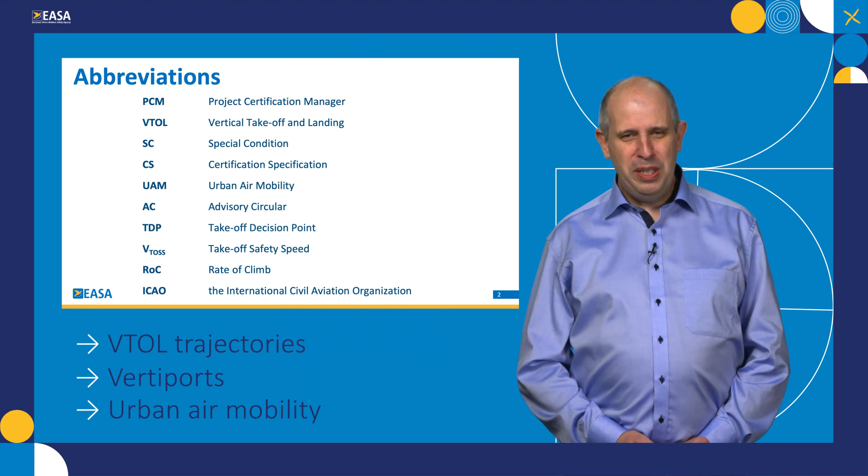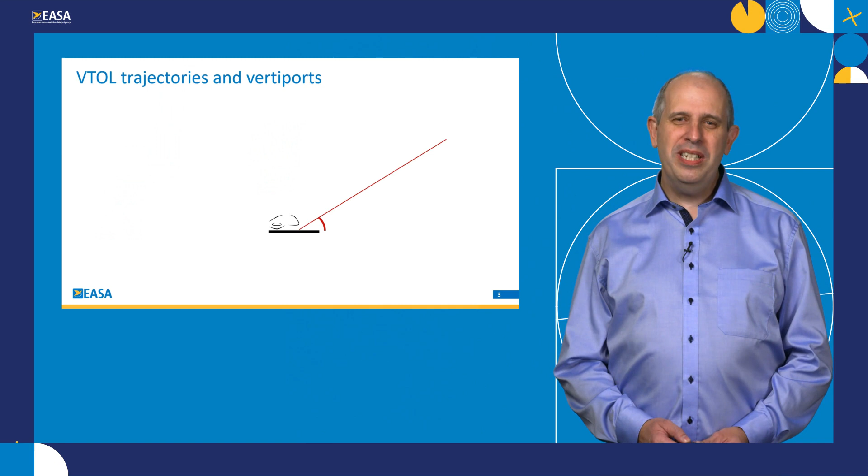VTOL trajectories and vertiports, why does it matter? If we consider a VTOL aircraft on a vertiport, the place from which it can land or take off, by definition a VTOL aircraft is capable of a vertical takeoff or landing. It may be, however, only the very initial portion of the takeoff that is vertical, with the rest of the trajectory being more or less shallow.

So if now we imagine urban environments, it could be that if this trajectory is too shallow, it may interfere with obstacles. In such a case, the vertiports have to be moved either further away from the obstacles or have to be elevated. So VTOL trajectories and vertiports matter in that they are elements to answer the question: what type of urban air mobility do we want?

If we are looking for intermodal connectivity, the vertiports have to be close to the streets, the train stations, bus terminals. It may be, however, that if the trajectories are too shallow, those vertiports have to be moved further away from city centers or have to be placed on top of tall buildings.

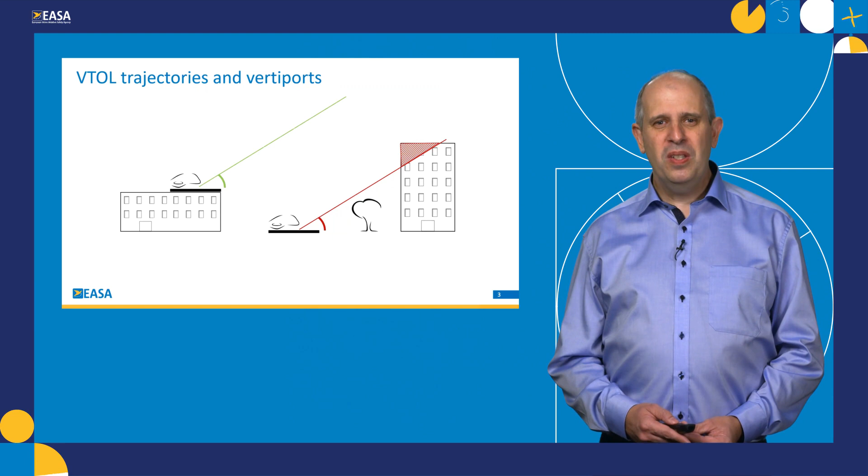EASA has published technical requirements for VTOL aircraft in a document we called Special Condition VTOL. I will present a few of these elements that influence VTOL trajectories.

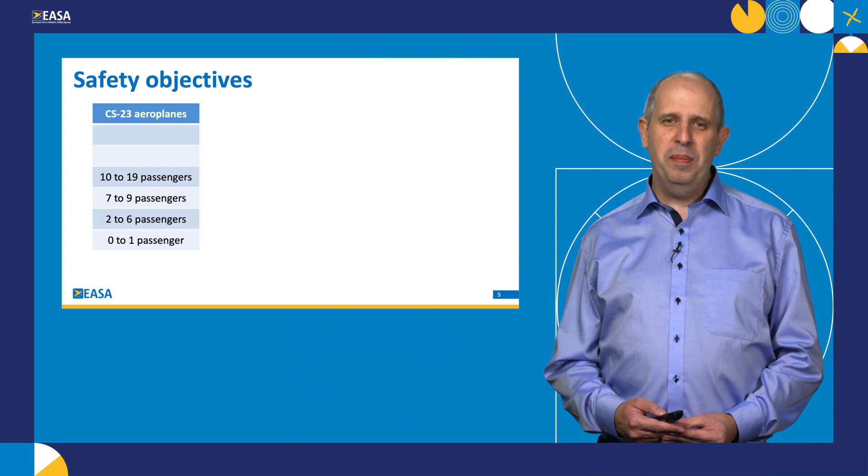The first ones are the safety objectives. For this, we took elements from airplanes where the objectives are proportional to the number of passengers on board. We also took the objectives from helicopters, which are independent from the number of passengers, but are divided in two categories: Category A, where in case of engine failure the aircraft is capable of continued safe flight and landing, and Category B, where in case of such failure a non-scheduled landing has to be assumed.

SC-VTOL combines both approaches with a category enhanced, independent from the number of passengers, equivalent to category A, and the category basic with a proportionality according to the number of passengers on board.

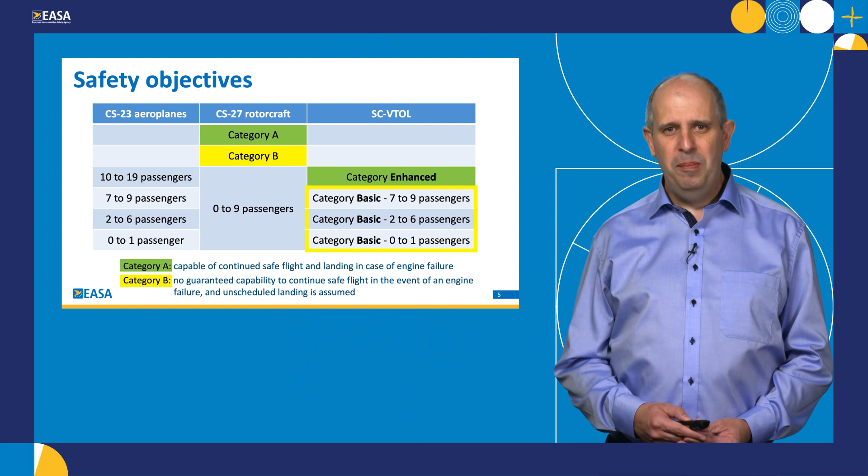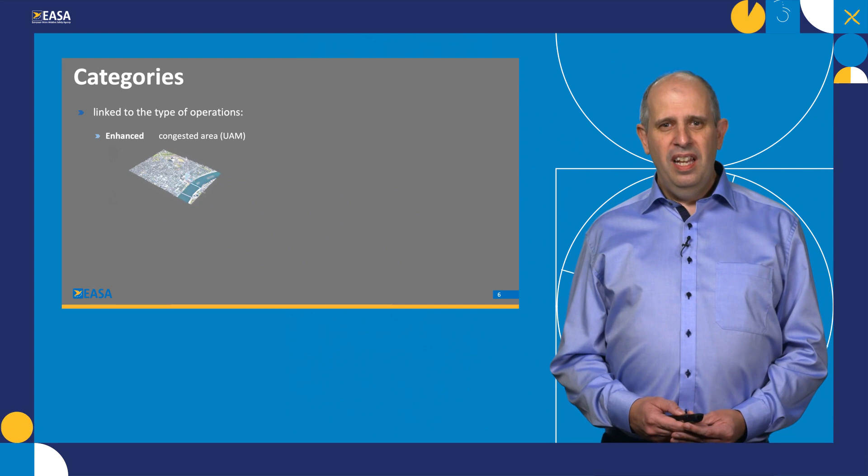A novelty we have introduced in SC-VTOL is a link between the categories and the type of operations. Category enhanced is requested for flights over congested areas, so what is referred to as urban air mobility. Typically this will be a flight over a city. It is also requested when performing commercial air transport of passengers.

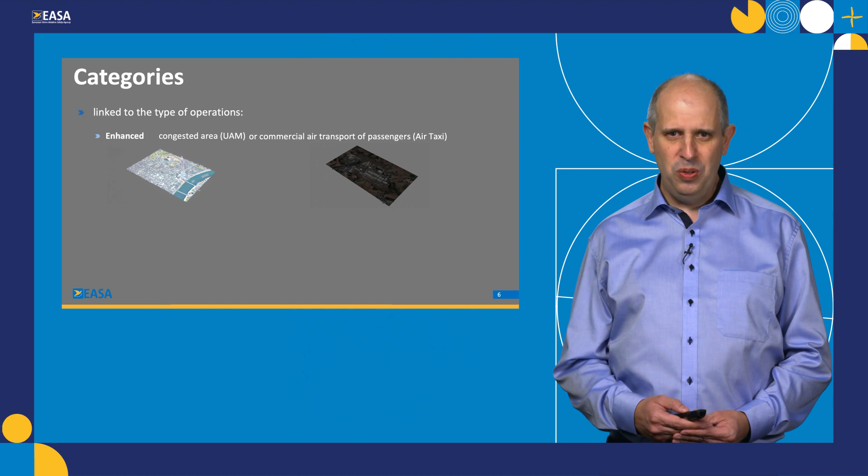An example would be when you land at an airport, then a VTOL aircraft comes and picks you up and brings you to your hotel. Even if you are not flying over a congested area, you will then be entitled to the category enhanced, and this is what is commonly referred to as an air taxi operation.

Basic is for all the other types of operations, for example, a private flight over the countryside.

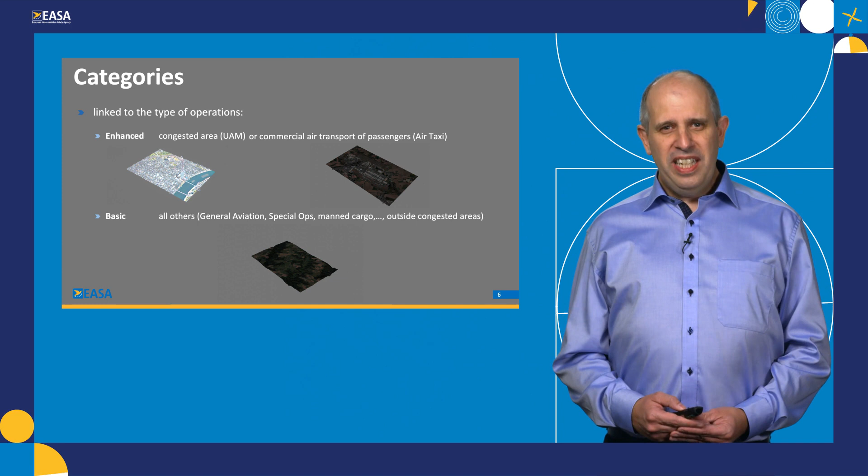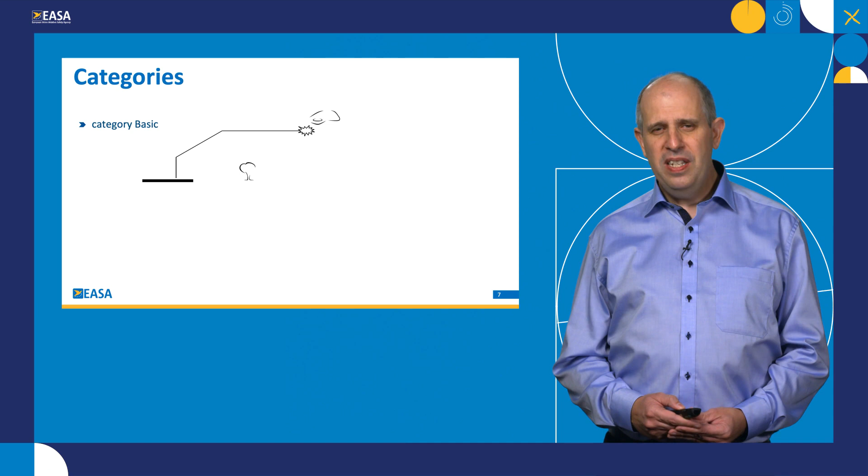With each category is also associated a performance objective. Category basic: if during the flight you have a failure of a system, it may be that you need to land right there and then. We, however, request that this landing be controlled, similarly to an auto-rotation for helicopters, and we refer to this objective as a controlled emergency landing.

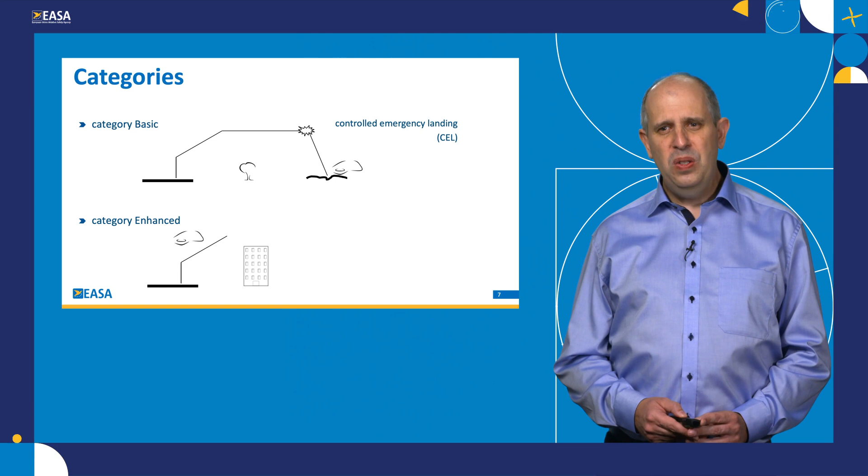For category enhanced, if you have a similar failure during the flight, then the objective is that the aircraft must be capable of either landing at the original destination, or it must be able to divert to an alternate vertiport. This objective is referred to as continued safe flight and landing.

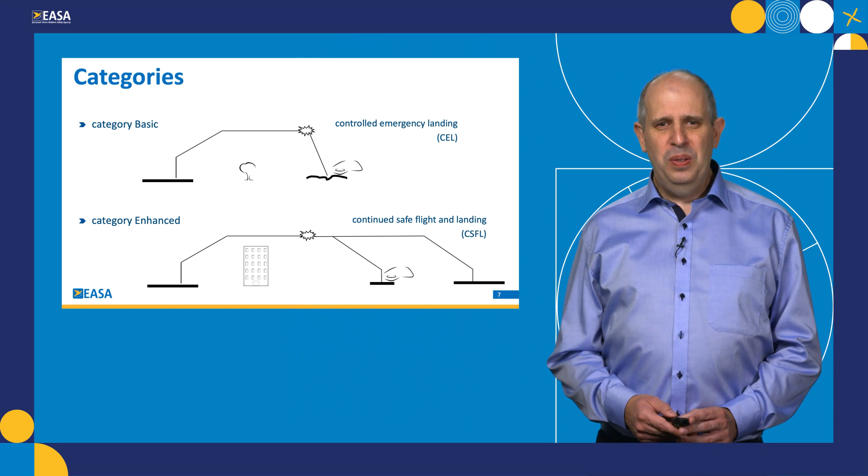Another element we had to work on is the catastrophic definition. Today, for helicopters, we have a number of different definitions. Some refer to continued safe flight and landing, some to auto-rotation, and we have also references to different numbers of fatalities.

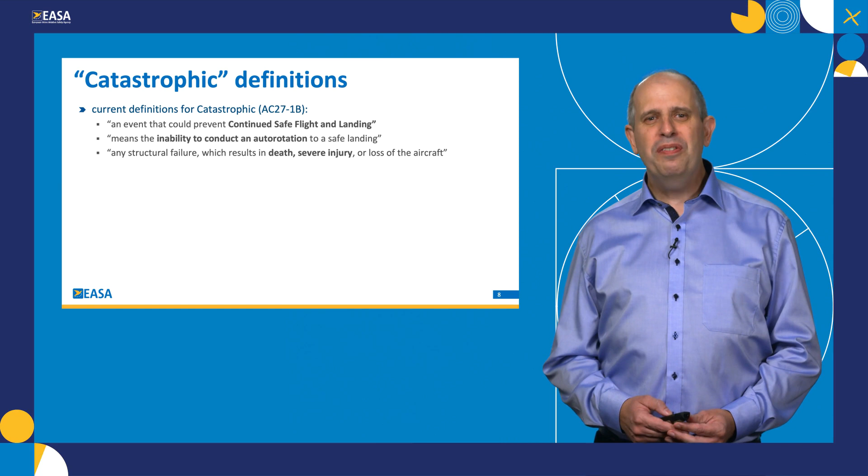So we consolidated all those definitions and introduced some proportionality through the categories. For category basic, multiple fatalities are catastrophic, as are failures that prevent a controlled emergency landing. For category enhanced, one or more fatalities are catastrophic, as are failures that prevent continued safe flight and landing. And for the rest of the presentation, I will focus on this last category.

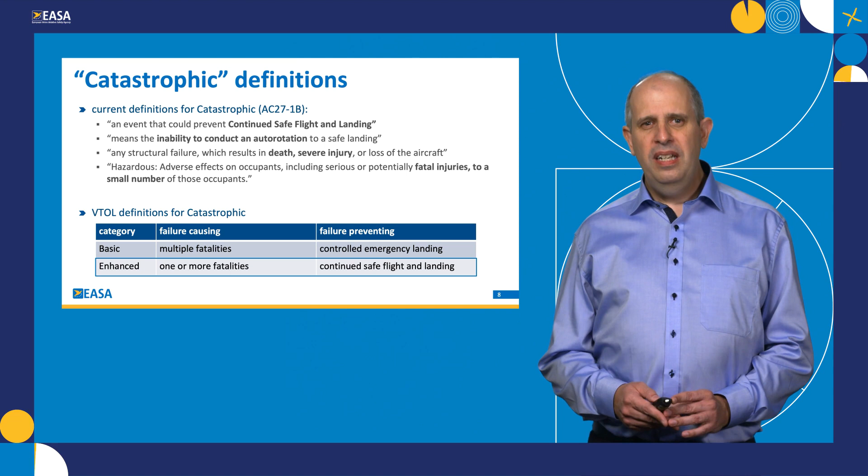An associated element is the critical failure for performance, or CFP. For helicopters in category A, we request a minimum level of performance in case of a loss of the critical engine or in case of one engine inoperative. The CFP is the equivalent for the VTOL aircraft.

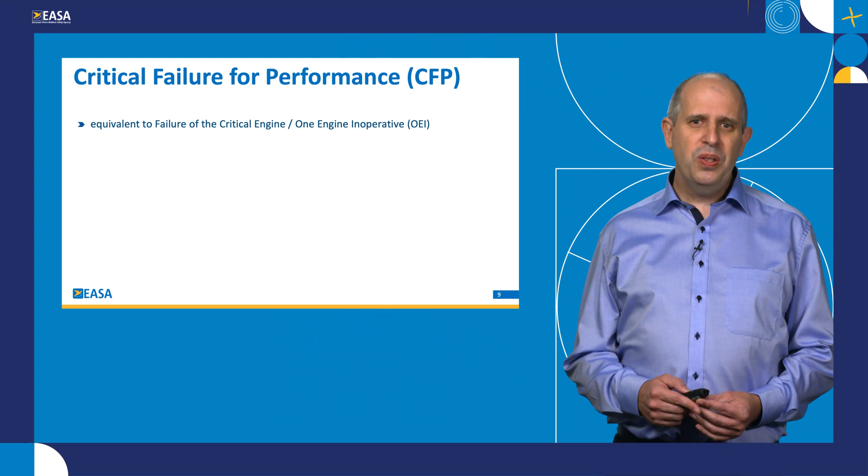However, while for helicopters in category A we have mostly 2 engines, for VTOL aircraft we may have up to dozens of them. So the CFP requests to consider single failures, but also any combination that is not extremely improbable. We also extend the concept not only to engines or motors, but to any failures of any systems that affect continued safe flight and landing. And typically this could be a battery.

We may also have a different CFP per flight phase and per performance parameter.

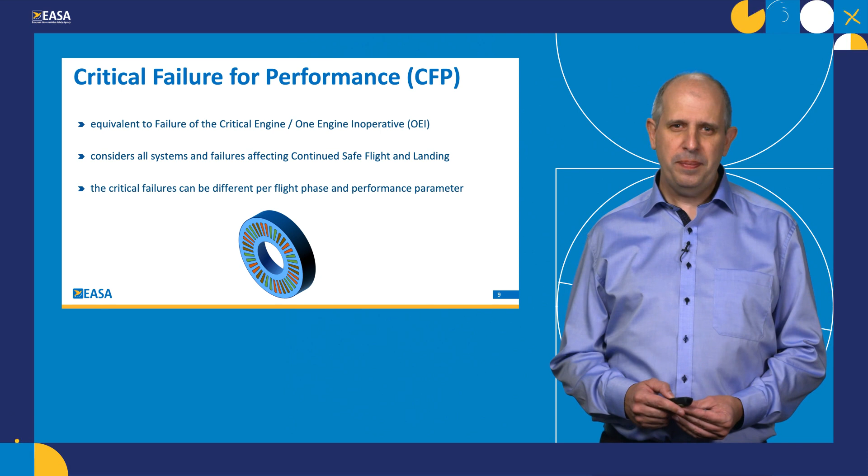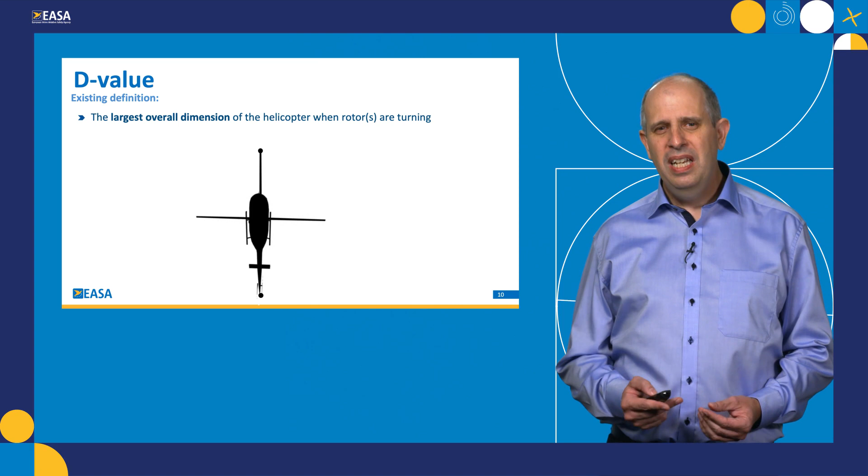Another element we had to adapt is the D value. For helicopters, this is defined as the largest overall dimension. And for most helicopters, this is defined by 2 points: the most forward tip of the main rotor and the aft tip of the tail rotor or the tail cone. This D value is used extensively for heliport design to provide obstacle protection.

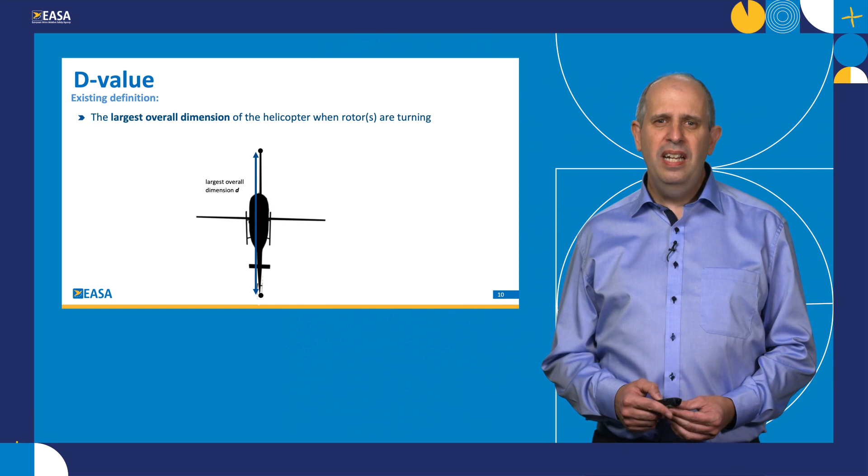However, specifically for obstacle protection, we are interested instead in the smallest enclosing circle, as by definition this is the smallest circle in which the aircraft can fit without hitting obstacles. For helicopters, the smallest enclosing circle is defined by the very same 2 points, so the dimensions are equal and it does not matter if you refer to one or the other.

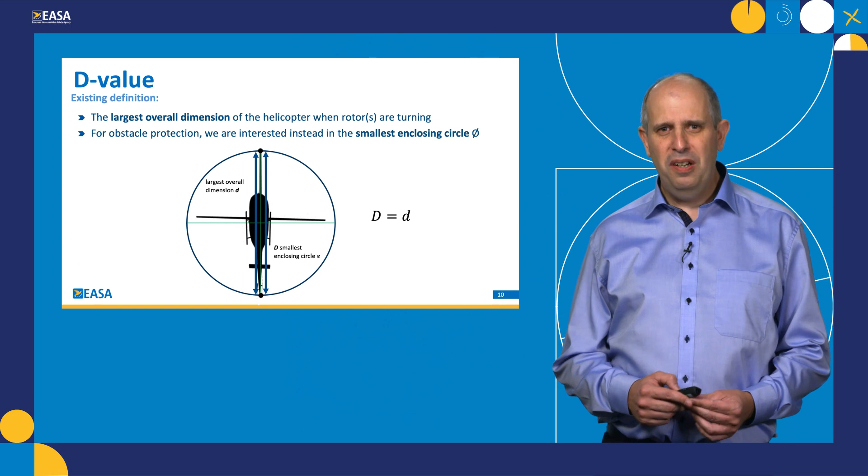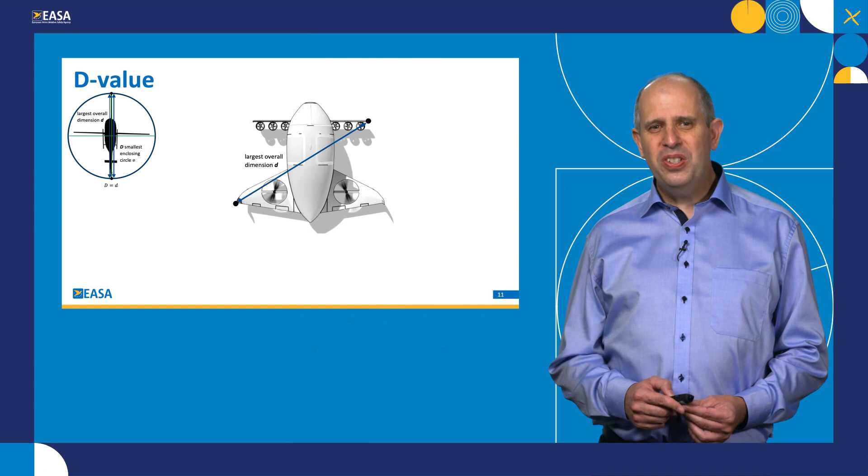For VTOL aircraft, instead, the situation may be different. If we look at an example of a generic VTOL, the largest overall dimension is defined by these 2 points, while the smallest enclosing circle is defined by 2 additional points. And we can visually observe that the diameter of the smallest enclosing circle is larger than the largest overall dimension.

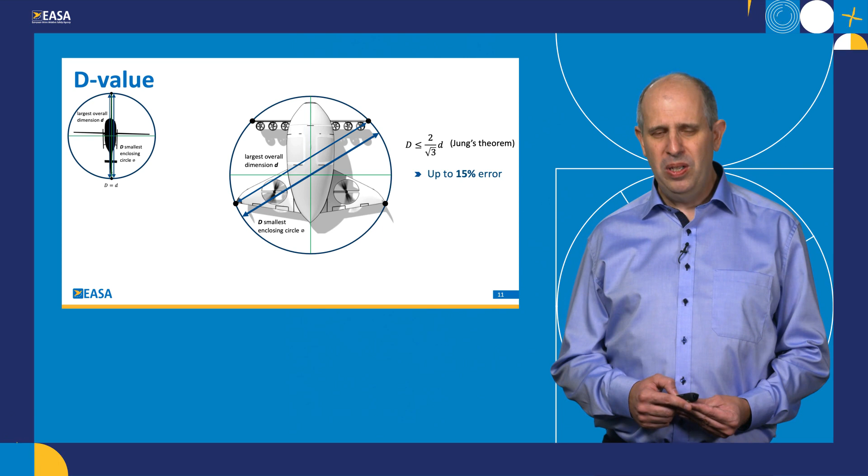It can be shown that there is a relationship between the two, and this equation means that if we were to use the largest overall dimension for obstacle protection, we may have up to a 15% error. So for VTOL aircraft, we are defining the D value as the diameter of the smallest enclosing circle.

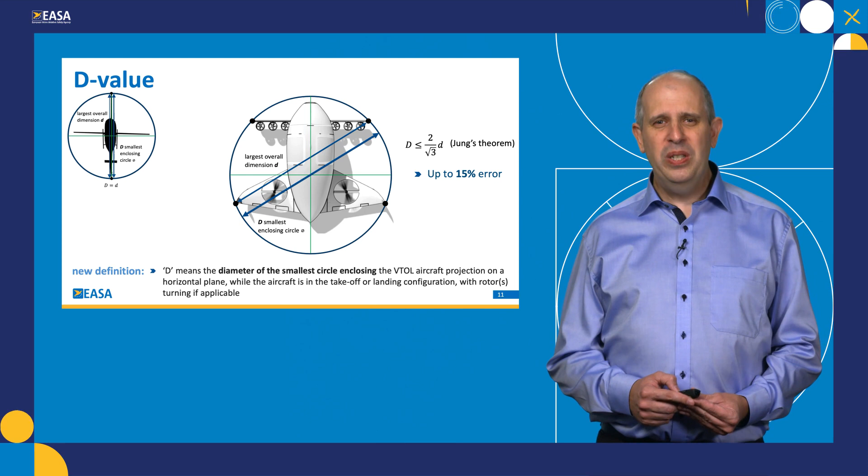With all those elements in place, we can now look at takeoff profiles and answer the question we initially raised: what type of urban air mobility do we want? The choice that EASA made was to leave maximum flexibility to the cities and to aircraft manufacturers.

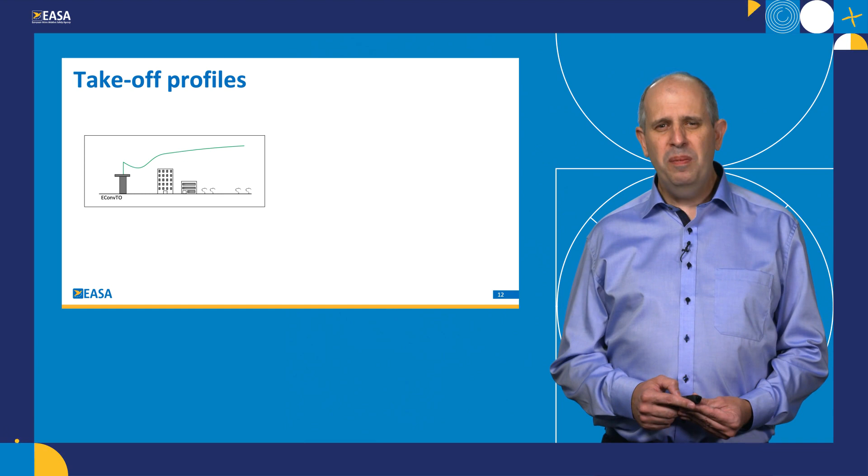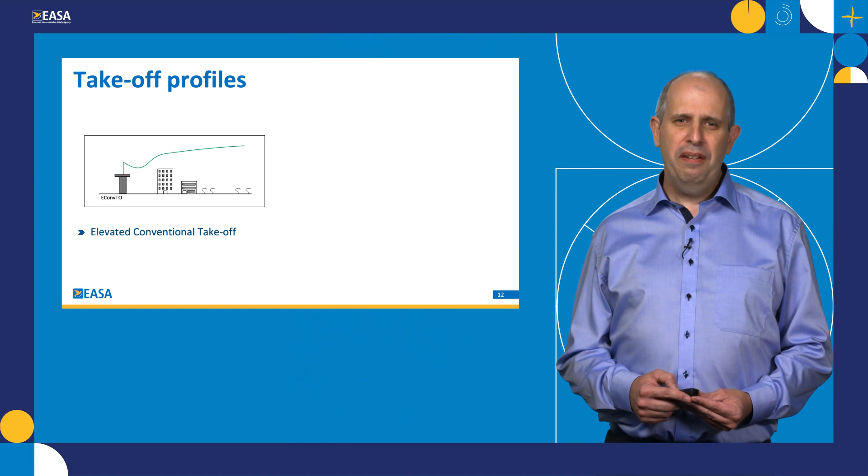For this, we are recognizing 3 different types of takeoff profiles. The first one, called elevated conventional takeoff, starts from an elevated position, which facilitates clearing obstacles, and we allow a dip in the takeoff profile after a critical failure for performance. The second type is called conventional takeoff, and this is more for clear areas where it's easier to stay away from obstacles.

Under the conventional takeoff, we also include takeoffs that may have a rolling portion on a runway, as for certain VTOL aircraft and certain types of missions, it may be advantageous to use a runway either for takeoff or for landing and to save energy.

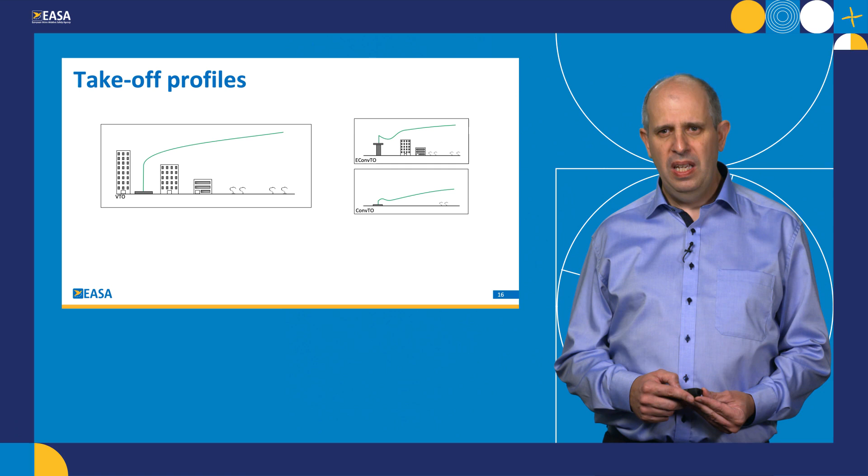Those first 2 types of profiles already exist for helicopters, but we have introduced a 3rd type, specifically for congested urban environments. We called this takeoff profile a vertical takeoff, as there is a larger portion that is vertical and that can be maintained even after a CFP.

All 3 takeoff profiles can be described with common elements, such as a takeoff decision point, which is the point after which the takeoff can be continued, even in case of a CFP.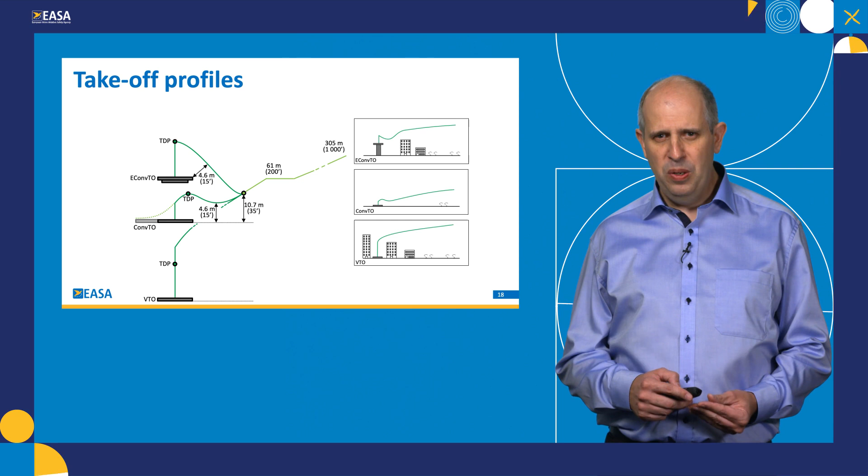We extend the takeoff profile up to 1,000 feet, and if we look more closely at this portion, it starts when a positive rate of climb is reached, as well as takeoff safety speed. It then climbs up to 200 feet on the first segment, after which the aircraft can further accelerate and climb up to 1,000 feet.

Those two altitudes are legacy from the helicopter world, and we will accept different ones, for example, to cater to a different type of en-route structure. On the first segment, we request a minimum climb gradient of 4.5%, and on the second segment of 2.5%. This climb capability must be maintained even in case of engine failure for the rest of the flight.

As is the case for helicopters in category A, as the first two types of takeoff profiles already exist for helicopters, there is existing material for the design of heliports that can be used also for vertiports. One example is the ICAO Annex 14 document, and here is an extract from it describing a takeoff surface that starts at the level of the heliport.

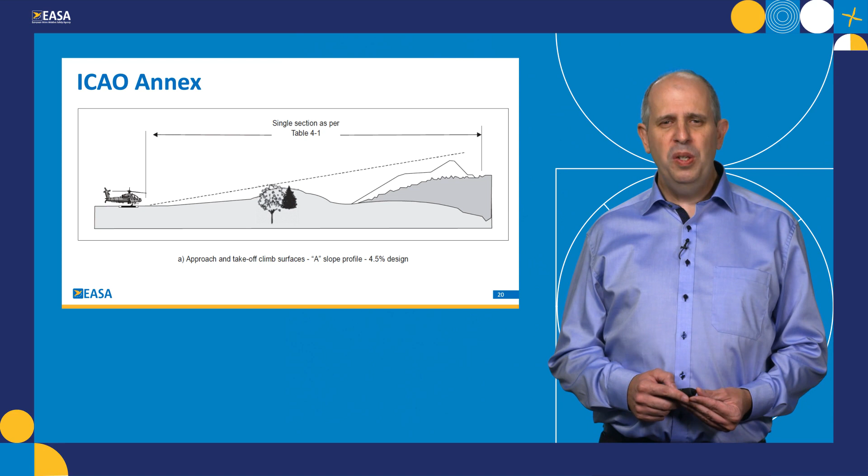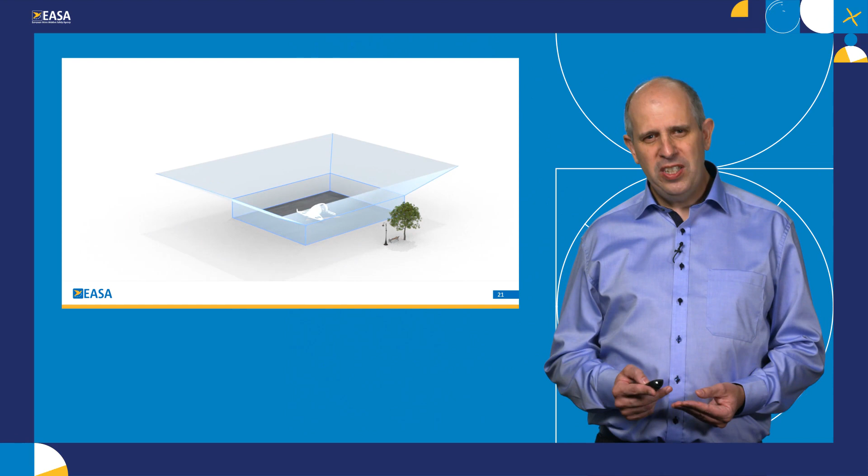Specifically for the third type of takeoff profile, we have developed a new volume for obstacle protection. Here is how this volume is built. It starts at the level of the vertiport, goes straight up, and the purpose is to clear nearby obstacles such as fences, lampposts, or trees. It then has a funnel shape to give more room for the aircraft to maneuver up to a certain height where obstacle limitation surfaces start for departure or for approach.

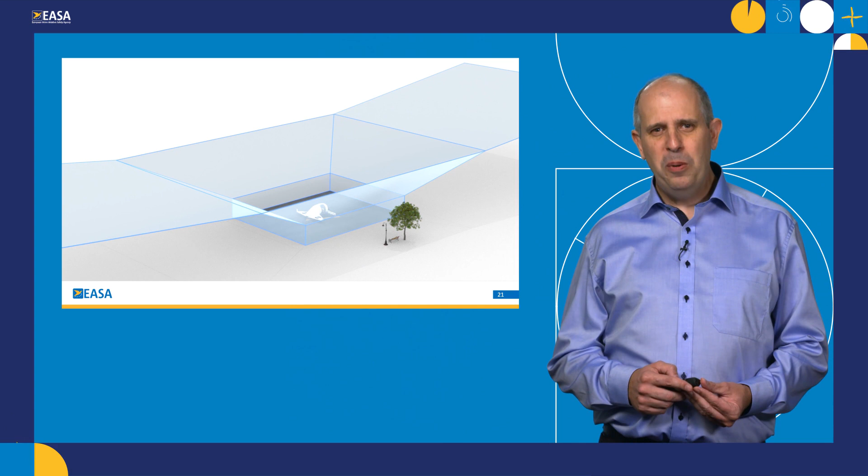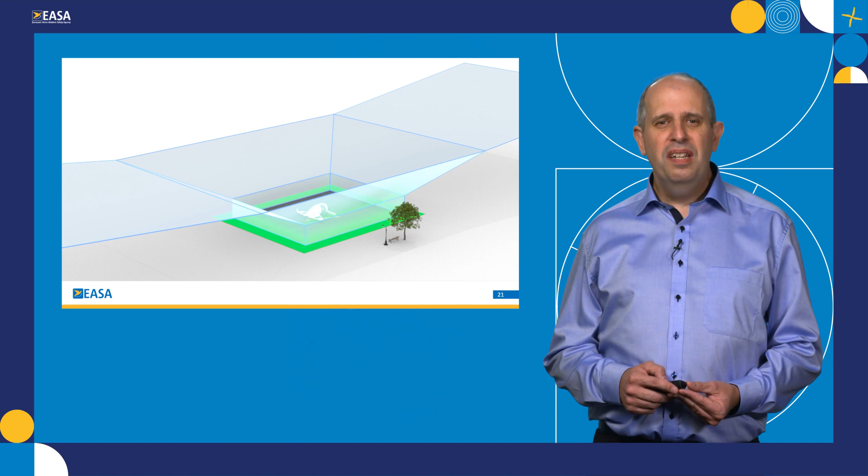So we give the opportunity to the aircraft manufacturer to demonstrate during certification that the aircraft can operate in such a volume. Then the vertiport designer can take this volume, add a safety area at the vertiport level, as is done today for heliports, and bring the volume up to provide an additional buffer that can then be used for operation of the aircraft. The aircraft manufacturer is free to choose the dimensions of such a volume.

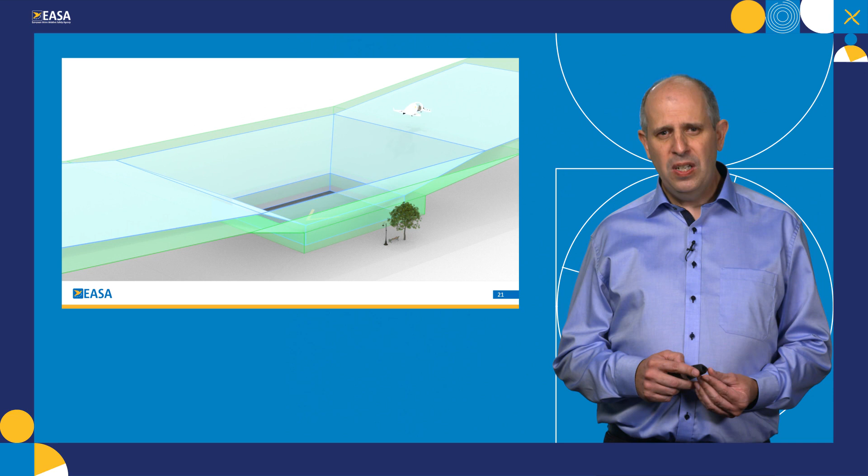However, for harmonization purposes, we are also proposing a specific type of volume that we call the reference volume type 1. This reference volume type 1 is foreseen to provide a reference between the aircraft manufacturer and the infrastructure designer in congested environments with a high number of obstacles. This reference volume has been developed by a working group comprising aircraft manufacturers, infrastructure designers, and aviation authorities, and it has specific dimensions as follows.

The vertical portion is 3 meters high, then the funnel goes up to 30 meters. The footprint is 2D by 2D, and at 30 meters high, it's 3D by 4D, from where the obstacle limitation surfaces start with a climb gradient of 12.5%.

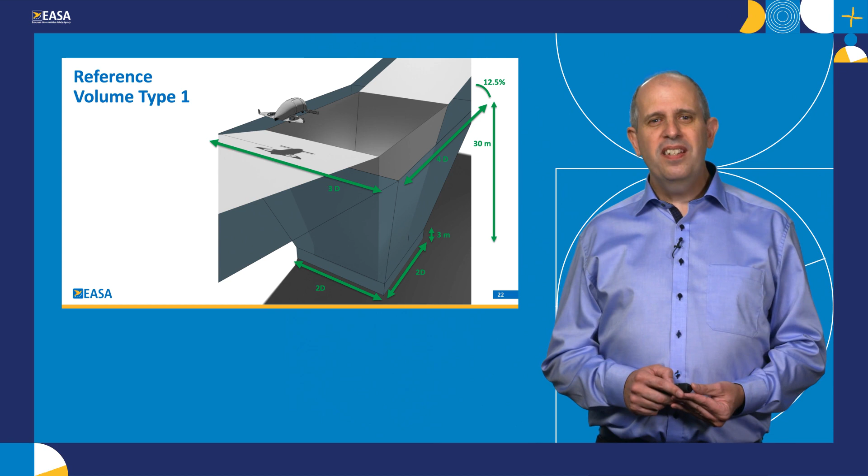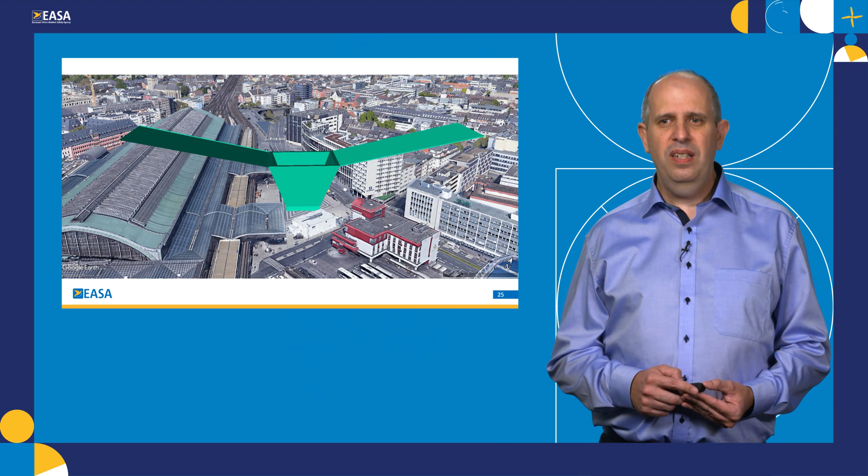Here is another angle where you can observe the goal of the vertical portion. In this case, it clears a nearby obstacle, a two-story temporary police barrack that is on the square. One last view, this time from the ground and looking over the bus terminal, and you can see that this volume is quite compact and fits well in the urban environment.

So we think this could be an element to help with intermodal connectivity. All the elements I presented have been published for public consultation, which just finished, and we have received a large number of comments. So we will look carefully at them and make adaptations where appropriate. Thank you for your attention.